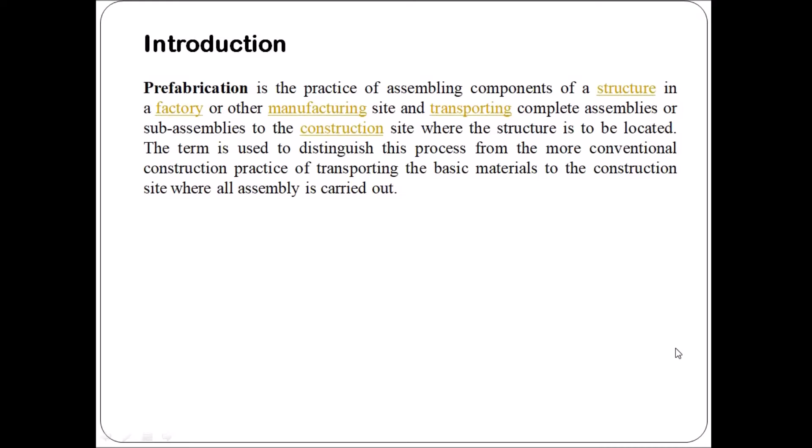The necessity of prefabrication. Estimates made by studies indicate that India needs to add 700 to 900 million square meters of built space annually in urban areas to take care of the needs of shelter, healthcare, education, industry, trade and commerce, institution, entertainment, leisure, transportation, etc. for the population preferring urban areas as their habitat.

Considering the huge task of creating enormous built space, India needs to explore new, innovative and state-of-art construction technologies to meet the defined targets. Considering the physical, environmental and economic implications, construction sector needs to be made more effective and efficient by using state-of-art construction technologies.

In search for appropriate solutions to promote cost-effective, resource-efficient, sustainable and eco-friendly construction, the paper looks at the option of prefabrication as an approach, which can go a long way in making building construction more rational in terms of cost, time, economy, quality, sustainability, resources, material, etc. In addition, the paper also looks at the ways and means to make prefabrication more qualitative, cost-effective and energy efficient for promoting state-of-art sustainable built environment.

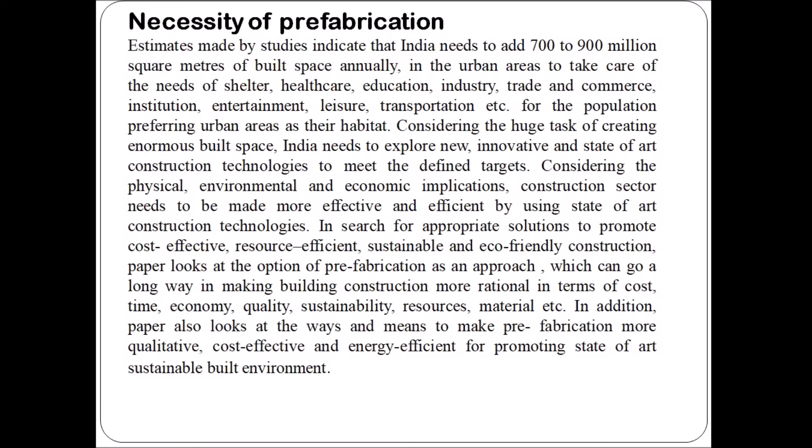Traditional on-site construction issues. Majority of construction taking place now in India follow the traditional on-site pattern of construction. Traditional on-site construction is described as linear construction, where each individual step is not only constructed entirely or largely on-site, but also needs to be completed before the project can move on to the next phase. Such construction has major implications in terms of time, cost, quality, safety, noise, pollution, manpower, etc.

So, let us discuss some of the demerits of the traditional on-site construction. Majority of building components are constructed largely on-site. Linear construction means where every step needs to be completed before taking up the next one. Considerable time taken for construction. So, traditional on-site constructions are highly time consuming. Generation of large-scale waste. So, this is waste intensive. Construction schedule largely dictated by prevailing weather conditions.

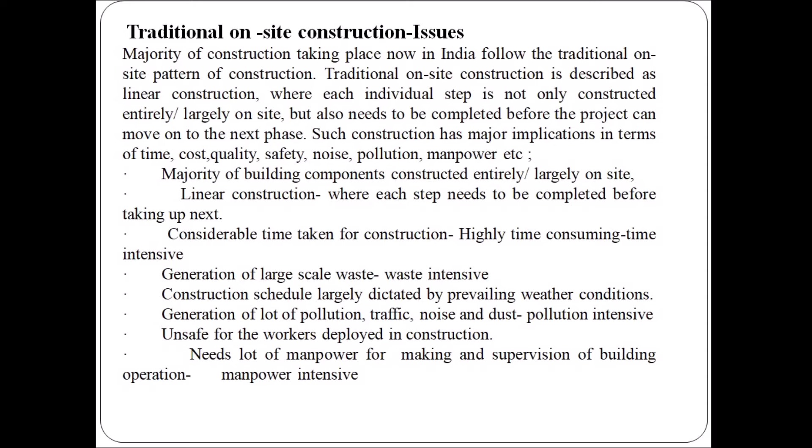Generation of lot of pollution, traffic, noise and dust pollution. And it is unsafe for the workers deployed in construction, needs a lot of manpower for making and supervision of building operation, large inventory of material storage facilities at site, creation of accommodation for workers deployed at construction, loss or theft of material from site, large variation in quality, use of water or energy, increased initial cost of construction, uneconomical in cost and resources,

delayed return on project, unpredictable project schedule, limited application in hazardous areas, large site disruption, adverse impact on surroundings, and it is totally constructed depending upon the availability of manpower.

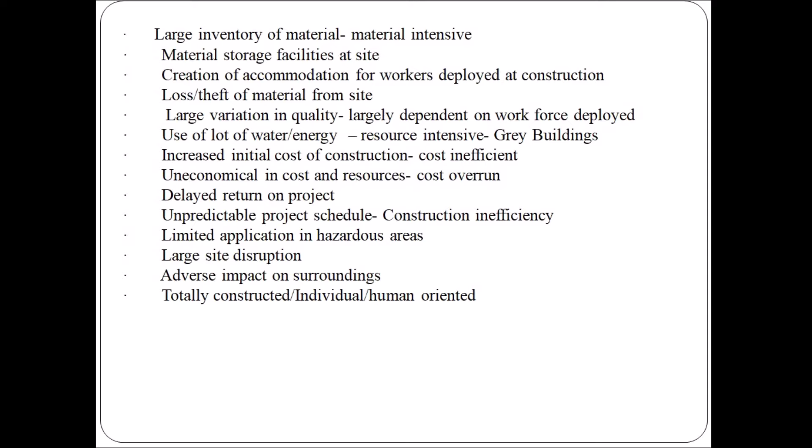The scope of prefabrication of buildings. So looking at the entire context of on-site construction, it was considered prudent that instead of on-site construction, off-site modular constructions offer enormous opportunities, which not only overcome the disadvantages of traditional construction, but also offer distinct advantages in terms of cost, time, quality, safety, environment, materials, etc.

Offsite construction is a process that incorporates prefabrication and pre-assembly. It involves creating individual building components off-site in a designated factory, shipping said parts to the plot of land and installing these components to create a finished structure. Off-site fabrication requires a project strategy that changes the orientation of the project process from construction to manufacture to installation.

This method of construction differs significantly from basic methods and offers numerous benefits for both the building owner and the construction agency. Despite distinct advantages of prefabrication as a process, it has got its limitations also. Prefabrication is bad for making last minute changes. It's good when the project is fine tuned to the last detail before starting. When done correctly, offsite construction can benefit a project schedule, budget and skilled labour requirements.

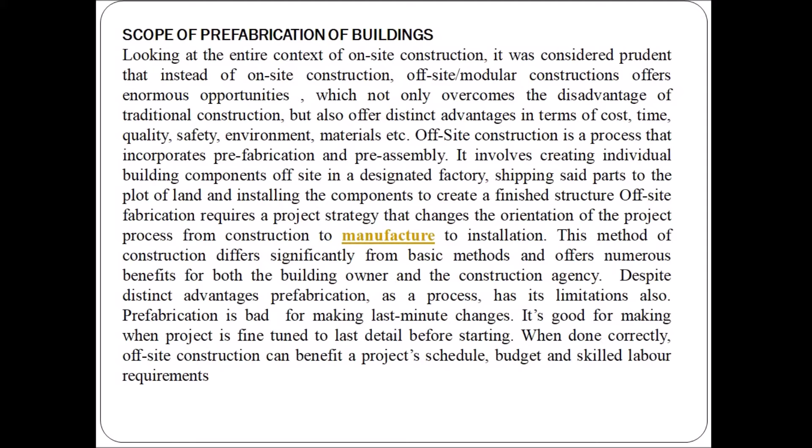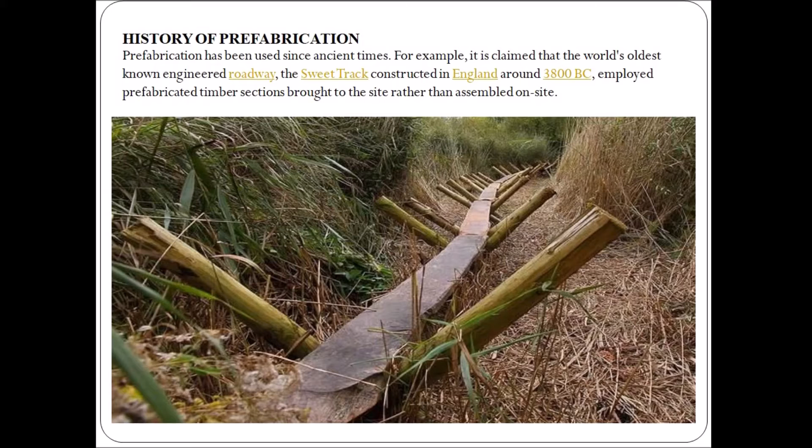The history of prefabrication. Prefabrication has been used since ancient times. For example, it is claimed that the world's oldest known engineered roadway, the Sweet Track, constructed in England around 3800 BC, employed prefabricated timber sections brought to the site rather than assembled on site. The Sinhalese kings of ancient Sri Lanka used prefabricated building technology to erect giant structures dating back as far as 2000 years, where some sections were prepared separately and then fitted together, especially in the kingdom of Anuradhapura and the kingdom of Polonnaruwa.

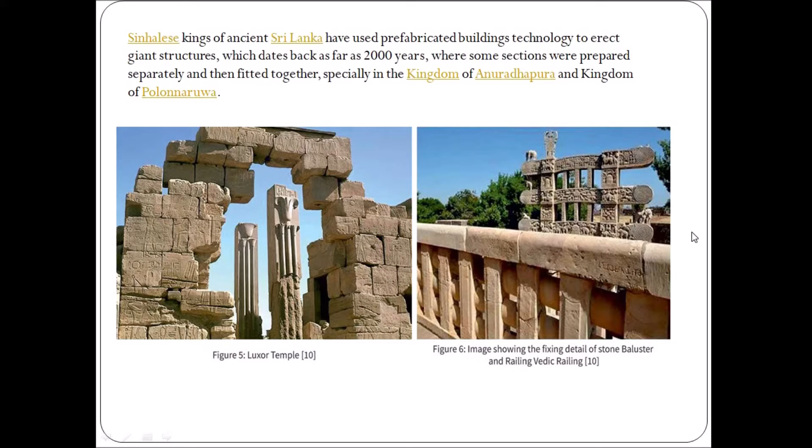In 19th century Australia, a large number of prefabricated houses were imported from the United Kingdom. The method was widely used in the construction of prefabricated housing in the 20th century, such as in the UK as temporary housing for thousands of urban families bombed out during World War II.

The current uses of prefabrication. The most widely used form of prefabrication in building and civil engineering is the use of prefabricated concrete and prefabricated steel sections in structures where a particular part or form is repeated many times. It can be difficult to construct the formwork required to mold concrete components on site, and delivering wet concrete to the site before it starts to set requires precise time management.

Pouring concrete sections in a factory brings the advantages of being able to reuse molds, and the concrete can be mixed on the spot without having to be transported to and pumped on the congested construction site. Prefabricating steel sections reduces on-site cutting and welding costs as well as the associated hazards. Prefabrication techniques are used in the construction of apartment blocks and housing developments with repeated housing units.

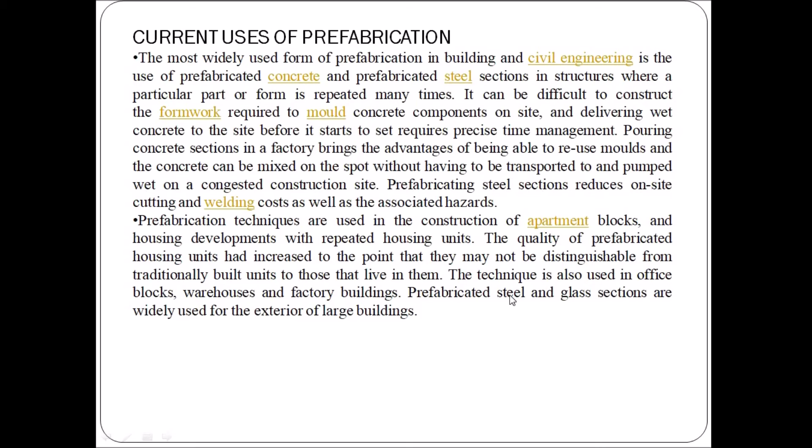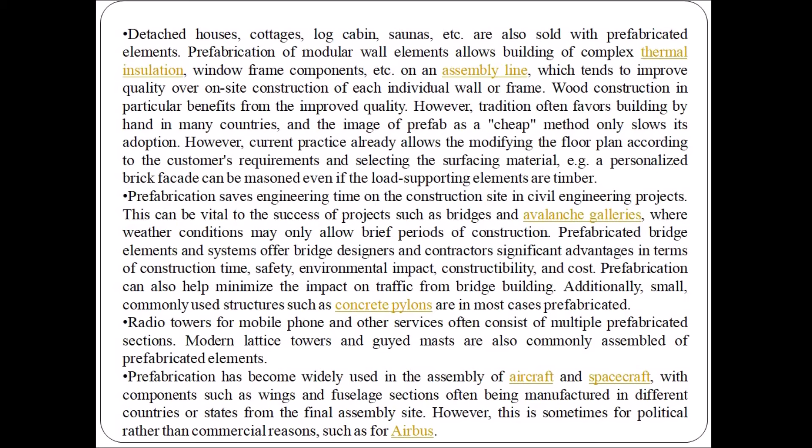Here I would like to share a video showing the prefabrication techniques being used. Recently, a 10-story building has been constructed in China in nearly 24 hours. So I'm going to share the video where they have used the modular prefabricated building design to build the 10-story building.

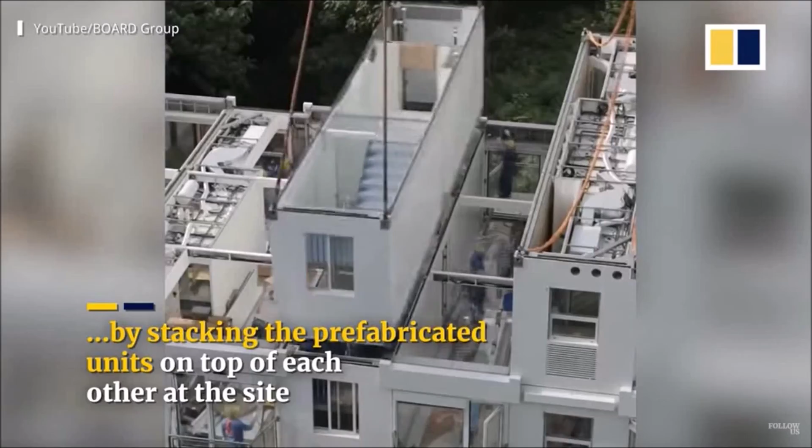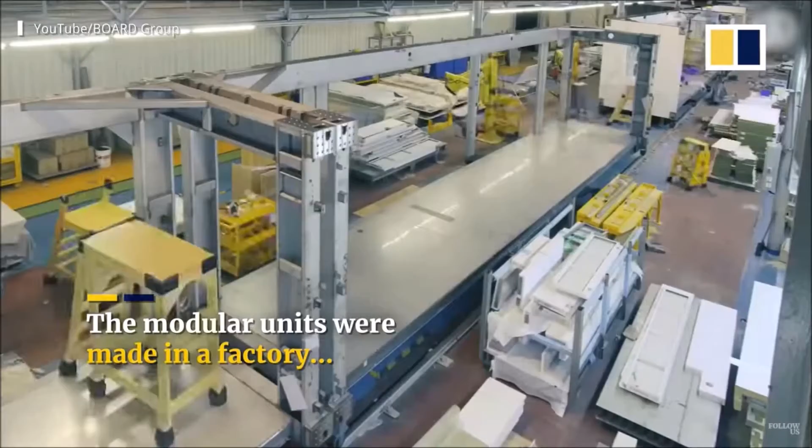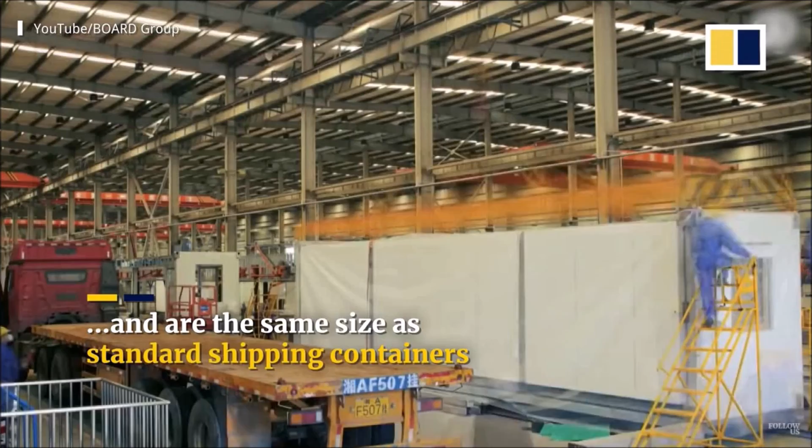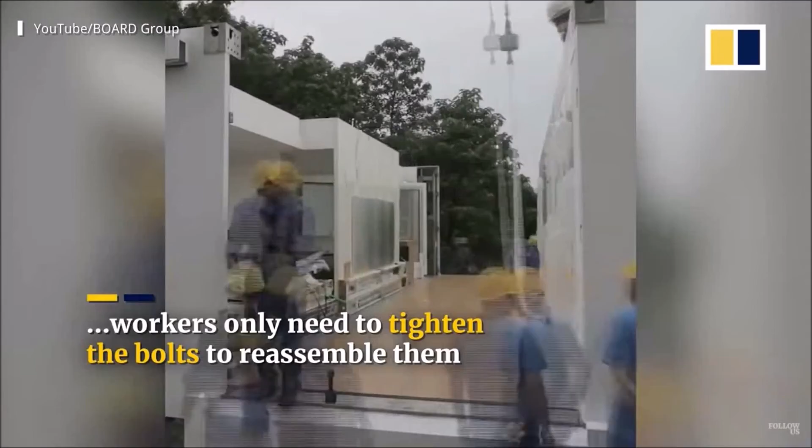So here you can see the units are constructed or manufactured in a factory, and then these units are transported to the construction site. After arrival of these units at the construction site, they are assembled and bolted together.

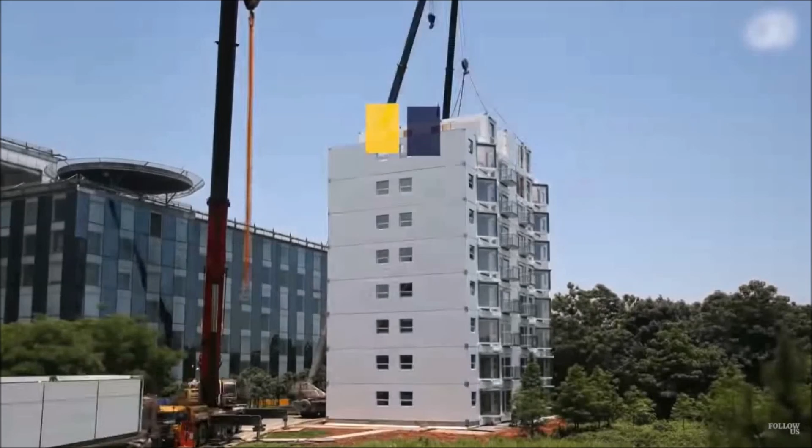So here we shall end the video. I hope you have got a little bit of an idea about prefabrication technology. In the next video, we shall discuss the advantages, the disadvantages, and classification of prefabrication.